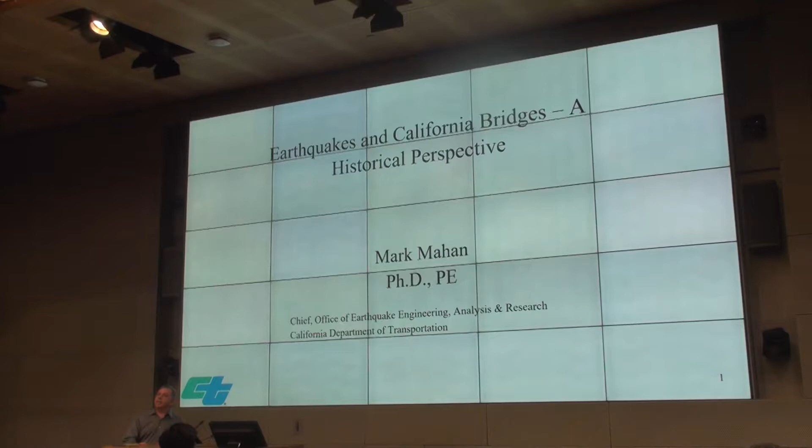The last presenter before lunch, but remember, I'm holding these. No flag, no lunch, okay?

Do I have 20 minutes or so?

Okay, again, I'm a practicing engineer. I've worked at Caltrans for the last 30 years. I've witnessed 2 of the big 3 earthquakes. I've been through Northridge, obviously, and the Loma Prieta in 1989. I was not around in 1971, but I need to present all those 3 earthquakes to you to see how much we learned, and to project into the future and make statements about the adequacy of our bridges for the next big earthquake that's going to come along.

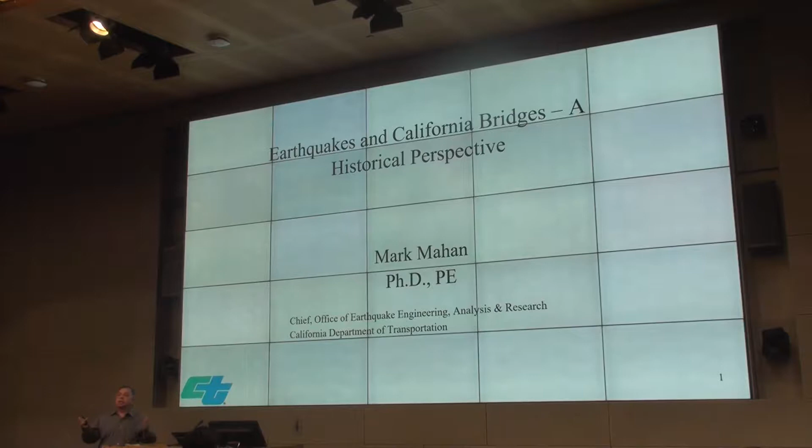California and Caltrans is the only DOT that writes its own seismic code. That's very important. FHWA, the feds, have trusted Caltrans to obtain an exception from all seismic requirements from all other 49 states, and then be able to write its own code. The reason that happened is because Caltrans and California was most at risk of earthquake, and it started earliest, after 1971, and then hustled and put together a code, something called the seismic design criteria.

How many of you are familiar with that, SDC? Okay, so I'm going to give you a little bit of history of it on how it developed. Let's see if I have a pointer here. No pointers? Can you hear me back there, by the way?

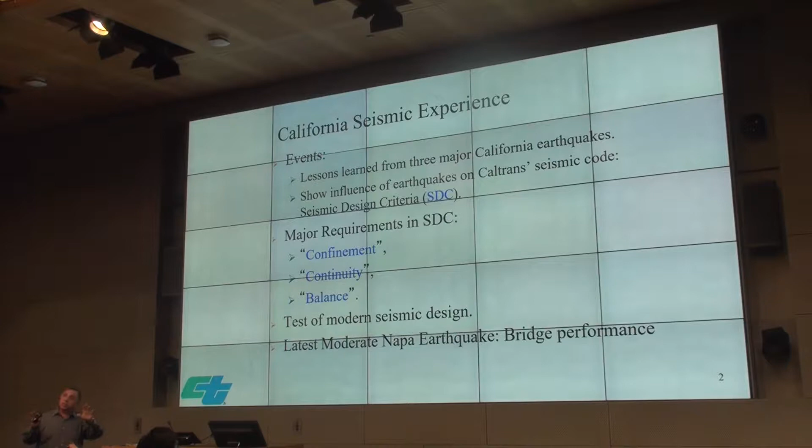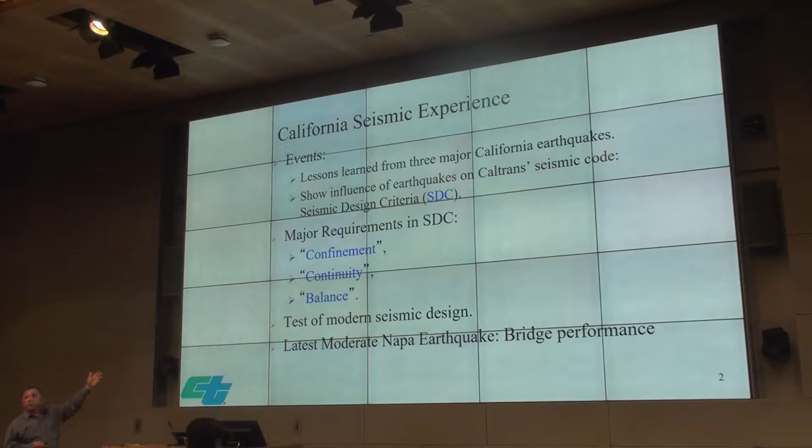No pointers, okay. I'm going to be talking about 3 major earthquakes and how we learned about confinement, continuity, and balance. That's my take of all the things that we have learned. Again, I'm highlighting those 3 items, and there are a bunch of other things that are, in my opinion, relatively minor to this. And after you do your billion dollar analysis at Berkeley, you come to Caltrans, and you only have to meet these. That's it, 3 small items.

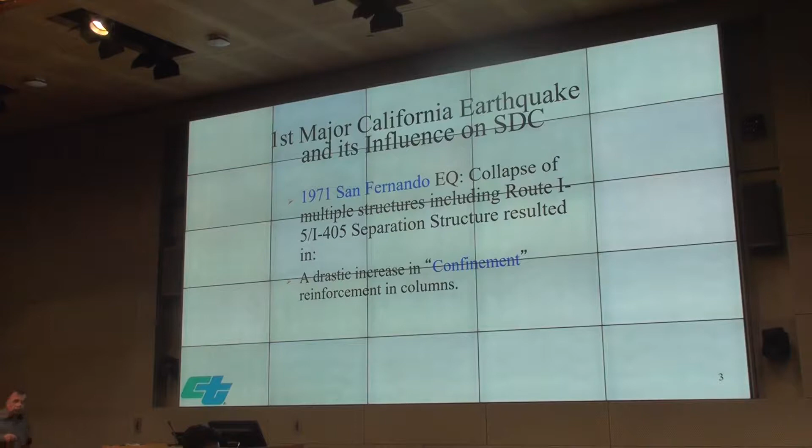Otherwise, that bridge would have completely collapsed. So that's why there were losses after 1994. 57 was mentioned, but on Caltrans bridges, unfortunately, just 1 loss, and that was a highway patrol officer. Okay, so we were lucky here.

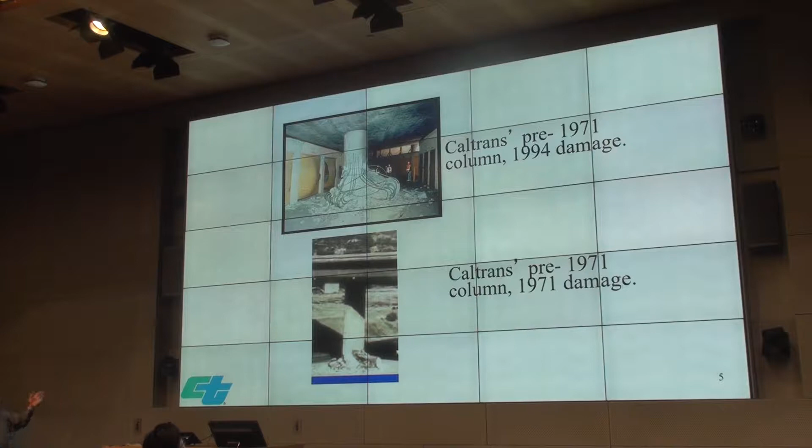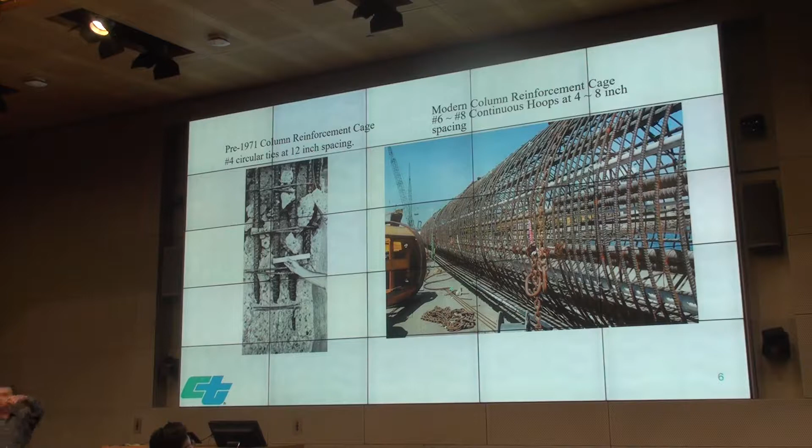We improved it tremendously till '89, and after '89 we bumped it up further. You see the picture on the right, that shows a column cage, and you see the amount of confinement on it, the hoops, the number of hoops. And the hoops are now what we call butt-splice continuous. Hoops are welded with ultimate splices, okay?

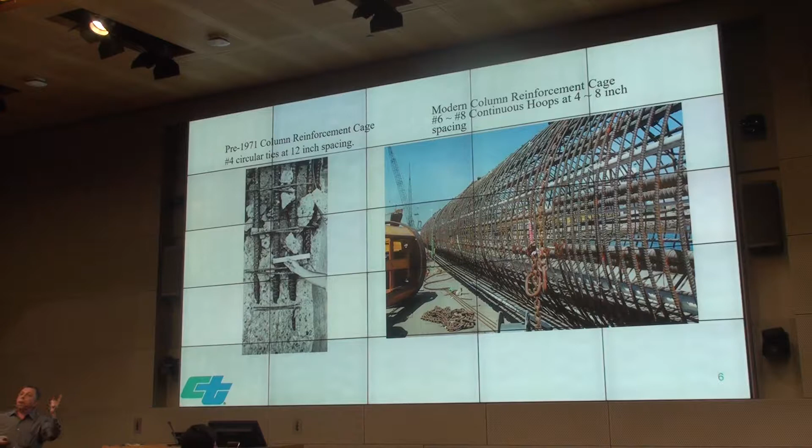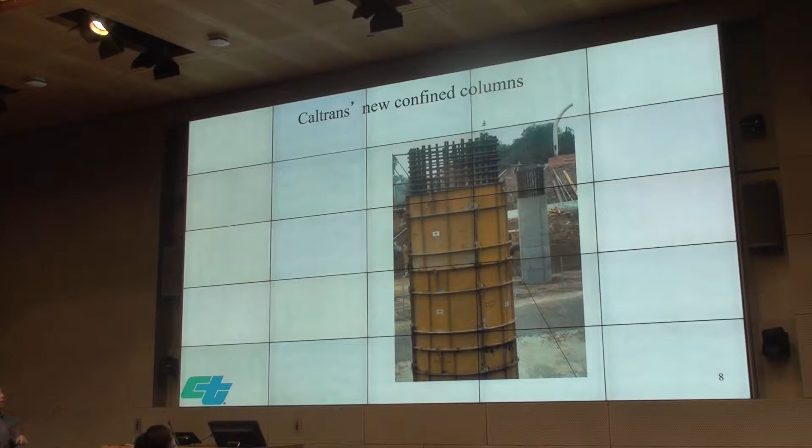We put that part of the cage into the superstructure to provide continuity, which I'm going to talk about. Again, the picture from 1971 - you see that column did not have much confinement to hold. We were lucky again, that bridge did not collapse.

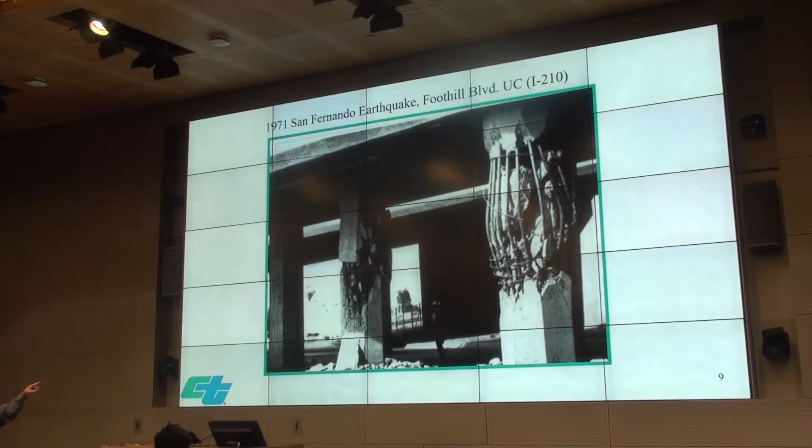It was very close. Okay, so the thing that you've got to meet, common sense engineering - it says delta capacity, displacement capacity should be greater than displacement demand. Common sense. Earthquakes demand deformation. If your structure, doesn't matter if it's a bridge, building, or whatever, can provide deformation capability, you can go through the earthquake without collapsing the structure. You may have to retrofit or replace the structure, but you can prevent loss of life. Okay.

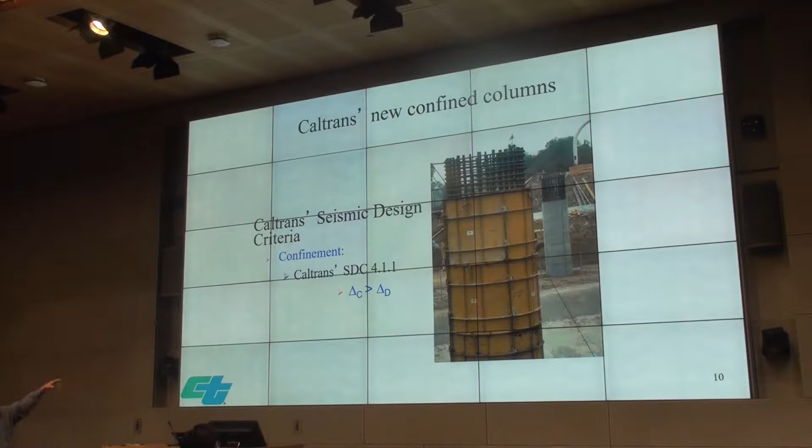So that is given in the seismic design criteria section, so we have to meet that. How do we do that? Well, we have to quantify the amount of confinement. The more confinement you put in a column, the more displacement you can get out of the column.

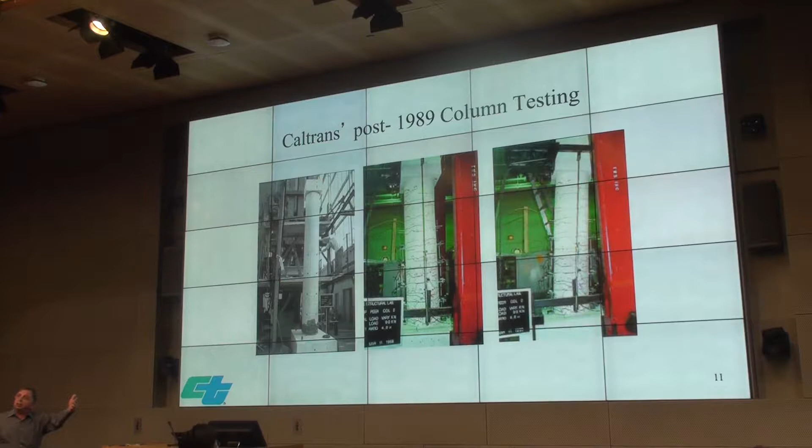We build small scale columns. We really cannot build the 6 and 7 foot columns that easily in the laboratory. You'll see we have limitations. So on these columns, we push and pull.

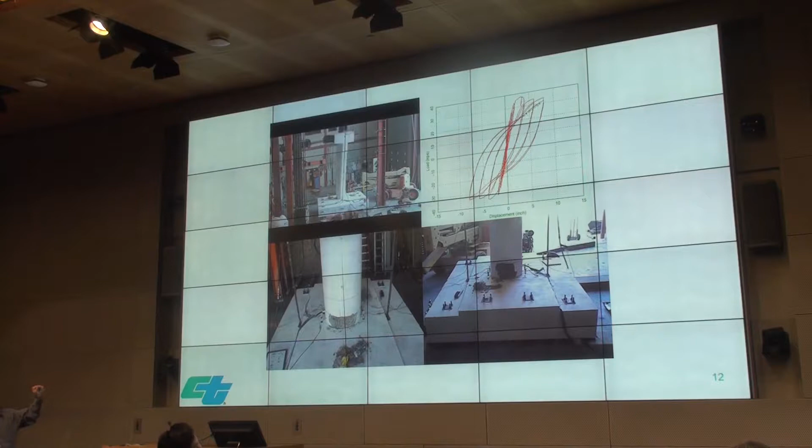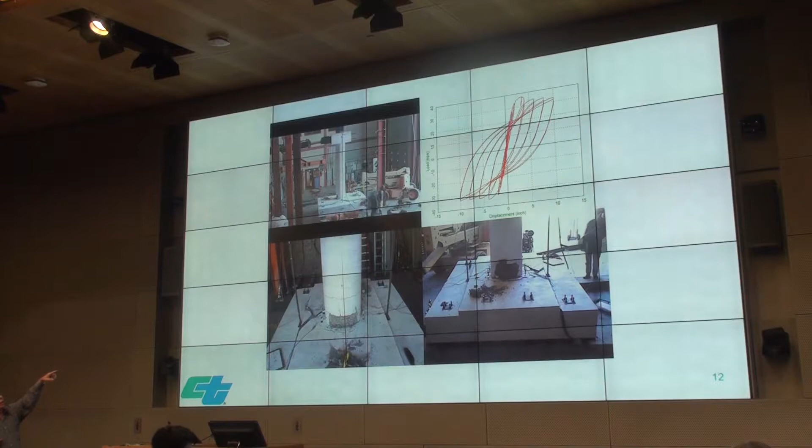And Caltrans has done that. We have used models from various universities, but we do have a model in our seismic design criteria. The picture on the top right, that's a hysteresis. That shows the performance of that column. The fatter and the bigger that hysteresis is, the more energy absorption capability of that column.

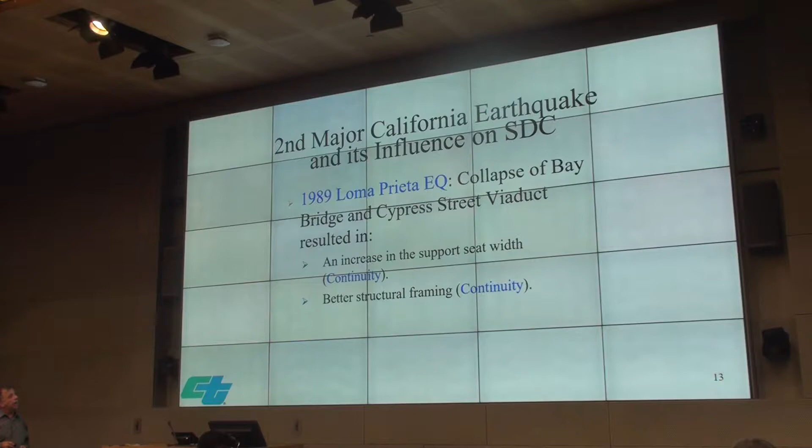The second earthquake, Loma Prieta, 1989, that was very bad. 40-some lives were lost at Cypress Viaduct, and at the Bay Bridge there was a loss of life, several losses.

This is the famous Bay Bridge where that piece in the middle, the 50-foot piece, fell. We were lucky because it did not punch through the bottom deck, and it did not go through the tower, because if it had done that, then the spans on both sides would have come down.

This bridge was designed for a 5-inch ledge on the left-hand side of that failure, and the slab, that floating piece slab, was sitting on it 5 inches.

Engineers back in the 1930s, when they designed this, I believe they designed it for 6% of G, 0.06 G lateral force. That's more or less the same amount as wind, comparable to wind. They couldn't imagine what kind of movement we're going to have on big bridges like this.

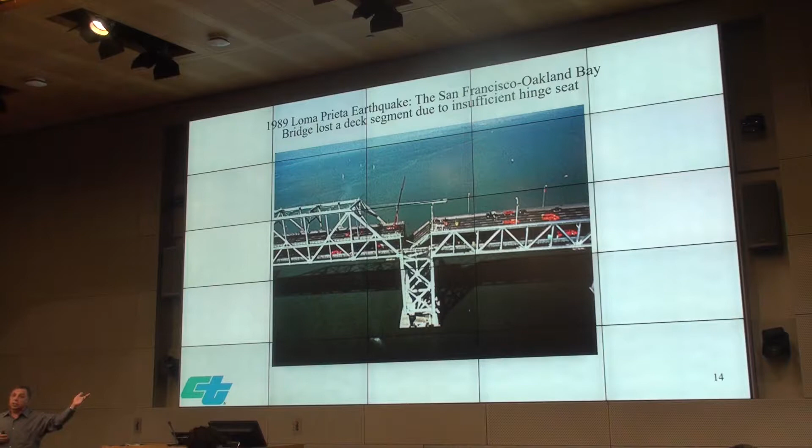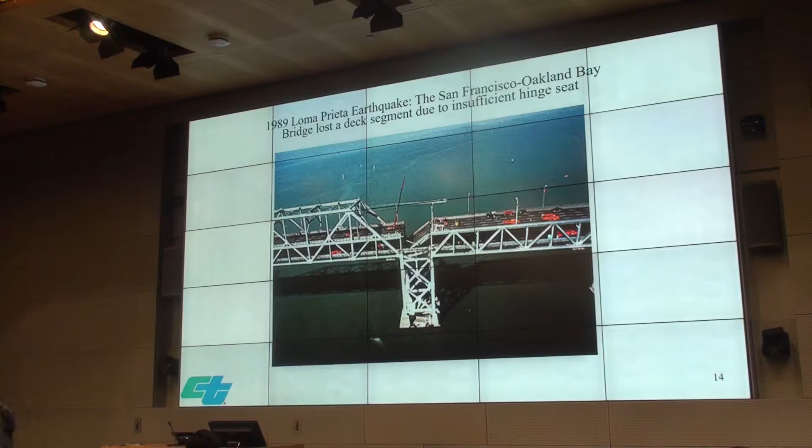It turns out the displacement demand is much larger. Even on the new Bay Bridge, the estimate of displacement demand is much larger than the 5 inches. Obviously it was not adequate, so it unseated and it dropped.

As you see here, in the 50s and 60s, you see that hinge, that expansion joint up there in that superstructure. That was a typical design. It was designed for 6 inches, and with shrinkage it would be really effectively 4 inches, and as soon as you shake the bridge, this joint will open up and we would lose one side of the bridge.

That was typical, and then we have a retrofit solution for that. We get inside the box and we put pipes through. The restrainer cables we did for a period of time, but now there's the best solution: we put a pipe through, so if it comes unseated, it sits on the pipe. It doesn't fall down.

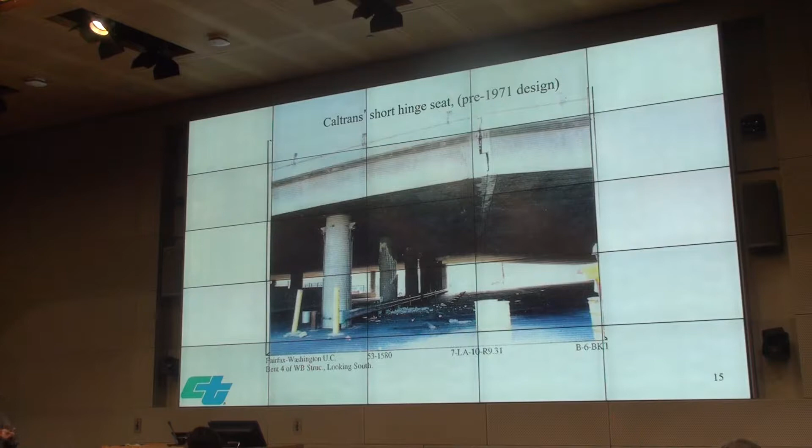The worst structure was the Cypress Viaduct. This happened because there were joints in the columns. There were 2 joints, one at the lower level, one at the upper level, and out of the 2 column bents, there's a column that you see and a column on the other side of the bent.

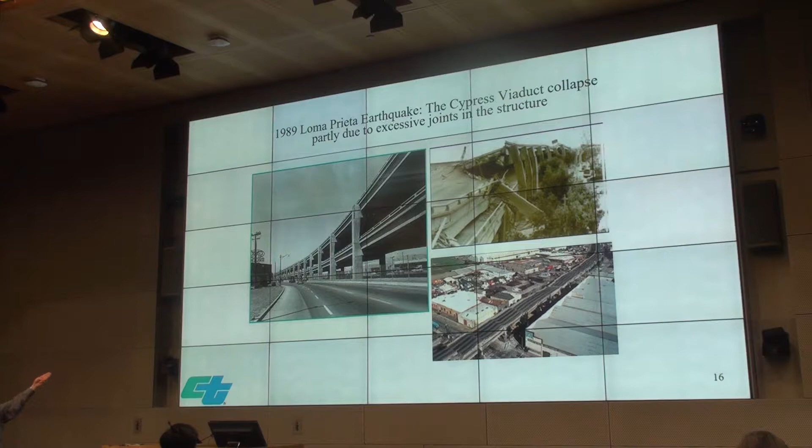Out of the 4 joints, there were 3 of them that were pinned, and the reason they did that was because of pre-stressing needs. Again, service performance dictated those joints, and those joints did not hold, and you see the pictures in here of all the failures. What do we do now?

We have no choice but to build continuous cages. These are column cages. You see how tall they are, how difficult they are to pick, and it is dangerous to pick this, but again, we have no other choice. We have to provide continuity for our cages.

Our structural elements cannot have too many breaks in them. The better the continuity, the better the performance during earthquake.

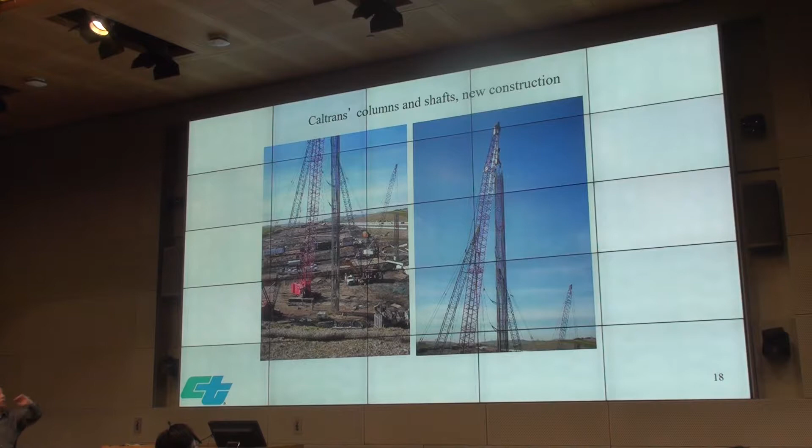This is from the New Bay Bridge. The picture on the right, on the top, that piece is going to be lifted, put on the piece on the left, and the two are going to be coupled together by means of what we call ultimate couplers, and that's the one right below, right there.

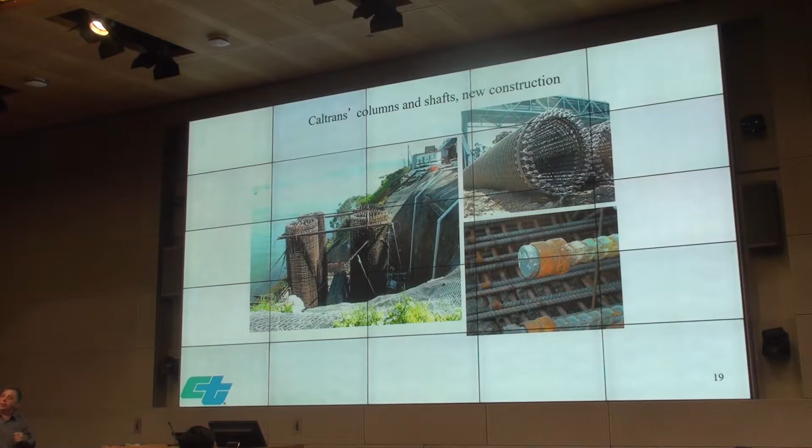Those are again developed by specifications that Caltrans developed. Ultimate splices was the requirement that was invented at Caltrans, and since then it's picked up. A lot of people are now using ultimate splices, and those are splices, mechanical couplers that if you pull it, you break away from the coupler. You break in the bar, not the coupler.

So, continuity - as we learn from it, we put it in our seismic design criteria. We have minimum standards now for our seats: 30-inch at abutment, 24-inch in the superstructure. We're going to bump that up in the next release to 30 inches to buy even more insurance. And in the cast-in-place box girder bridges that Caltrans typically builds, we provide enough continuity. We're comfortable about that.

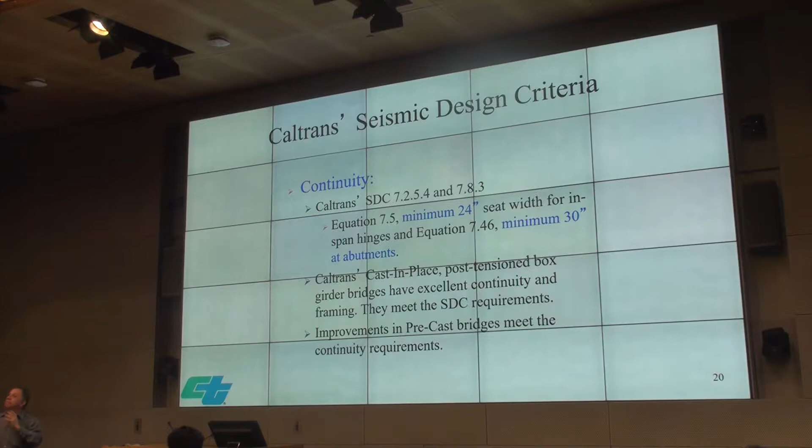Precast is a new phenomenon with what they call accelerated bridge construction. We have to build bridges faster and faster, and to do that we have to use precast elements. To do that, we have to provide better continuity, because one of the problems in Northridge was that if you put beams on columns and don't connect them properly, you shake them and you're going to drop them. So joints become very, very important in precast bridge systems.

What we learned - we thought we had figured this out before the '94 Northridge earthquake, but that taught us a lesson on balance. I'm going to focus on this and show you what that is.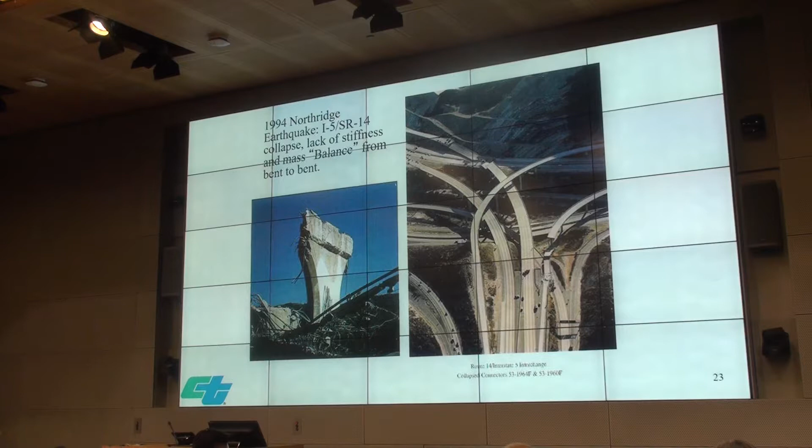A lot of people are using that picture, and the funny thing is that the bent stands up and the superstructure sheared off completely clean. It was puzzling for a while. A lot of people looked at it - UC San Diego, Professor Priestley, and others in seismic research examined it.

After a month or so, the conclusion was that if you look at the abutment in the background, where the car is parked, there was a loss of elevation, and people were puzzled why that drop was there. Then if you look carefully, the picture on the top right shows a completely crushed column. The picture on the top left shows the detail of that, and the picture below shows the loss of elevation.

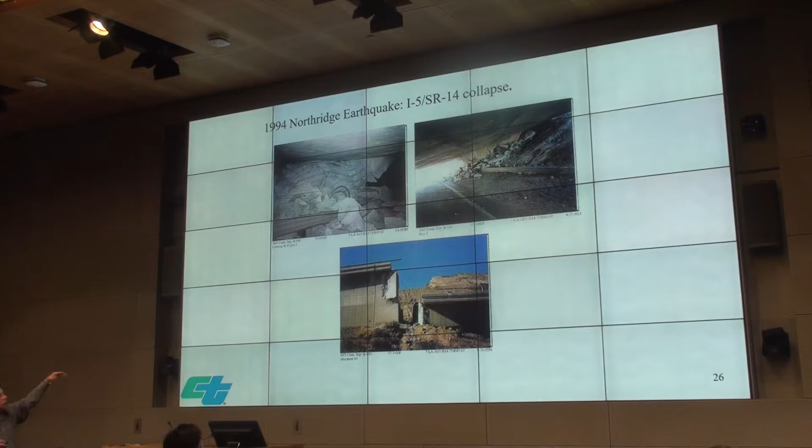There was a column further back, very close to the abutment, but it was a very short column - much shorter than the other bents. Therefore, when the bridge moved longitudinally, the short, stiff column took all the shear, failed in shear, and then the superstructure came down and started pulling on the rest of the bridge.

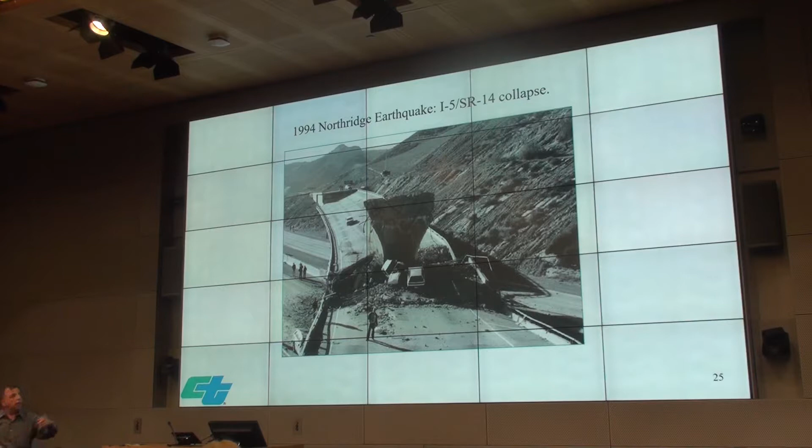That pulling caused a hinge two spans over to come unseated, and that came down. Once that came down, the superstructure connected to this bent on both sides got kinks in it - both sides were down. So those sheared off, and that's the picture, and that's how we learned about balance.

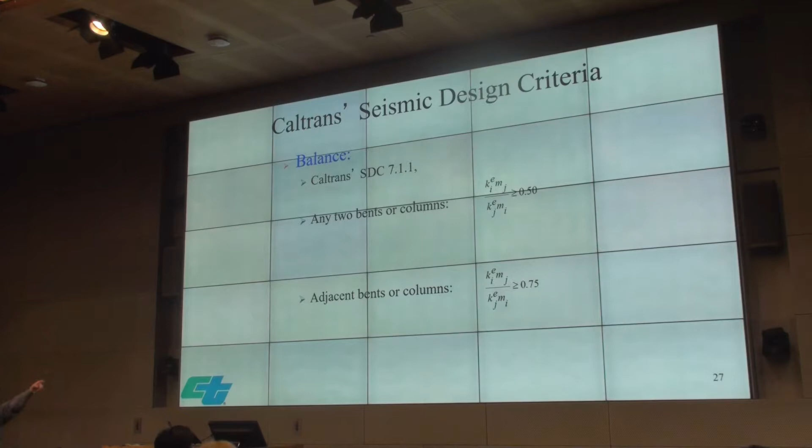So we are very careful not to do these things anymore. Looking at the lower picture, K2, K1 - that short column is going to be in trouble. So what are we doing with our existing columns? Unfortunately, you cannot change the balance on existing columns - it is whatever it is.

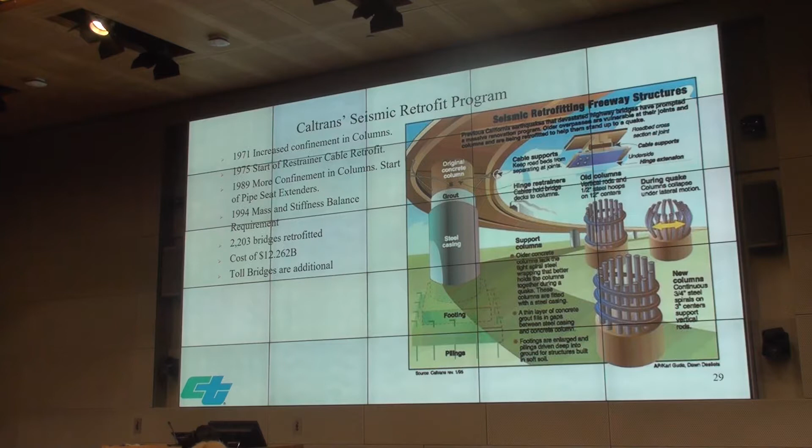So we jacket it and provide as much shear capacity as we can. Jackets work both for confinement and shear capacity. What is the proof in our practice? We build large column shafts - this is a 6-foot diameter column, actually tested by this university.

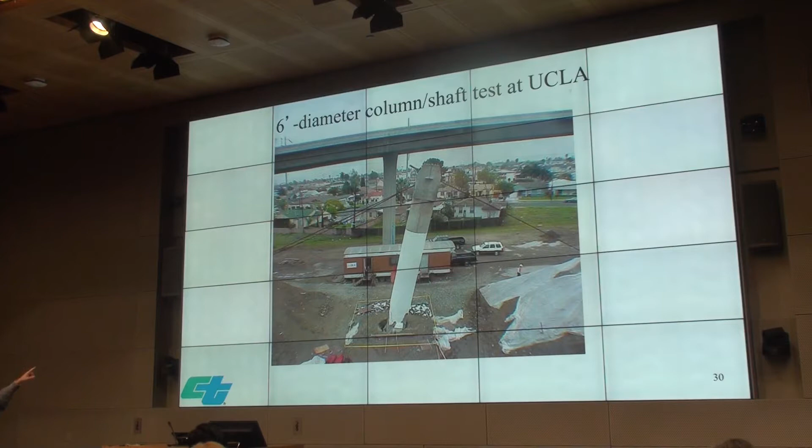We are abusing that column, pushing and pulling on it, and at this point we are not holding it with cables - we are actually pulling, meaning there is some moment capacity at the base of it. If you look at the base, you see that plastic hinge.

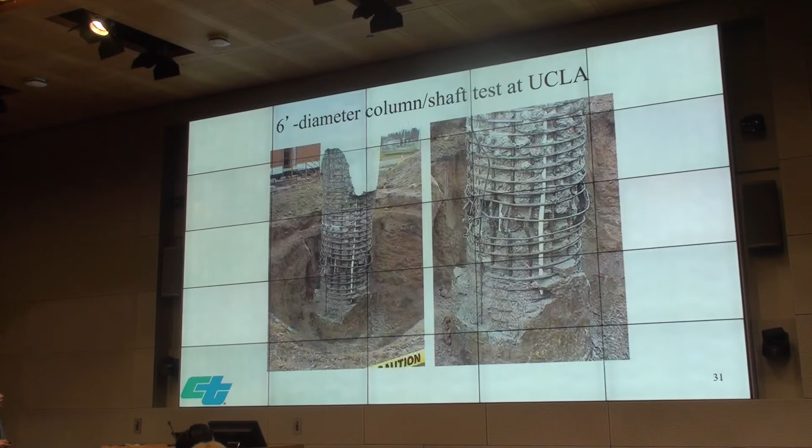So there is capacity left in there, proof that that column can go through that much displacement, 100 inches or so at the top. Very ductile column. This is a large size research, courtesy of UCLA, 250 tons, 500 kips of dead load on it, and the framing, the red framing is to catch it.

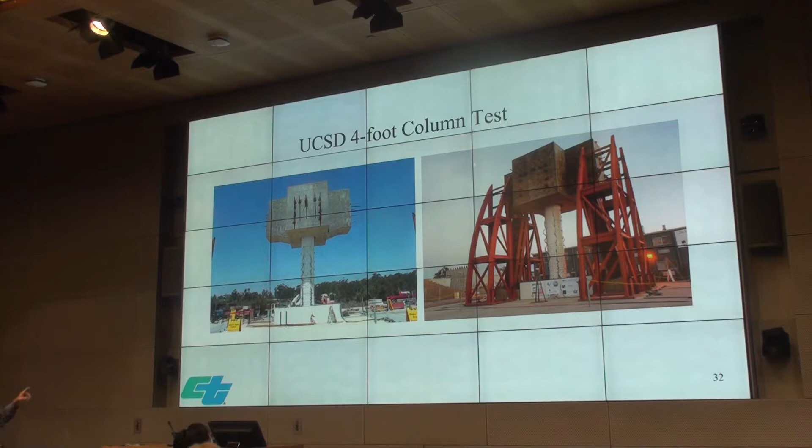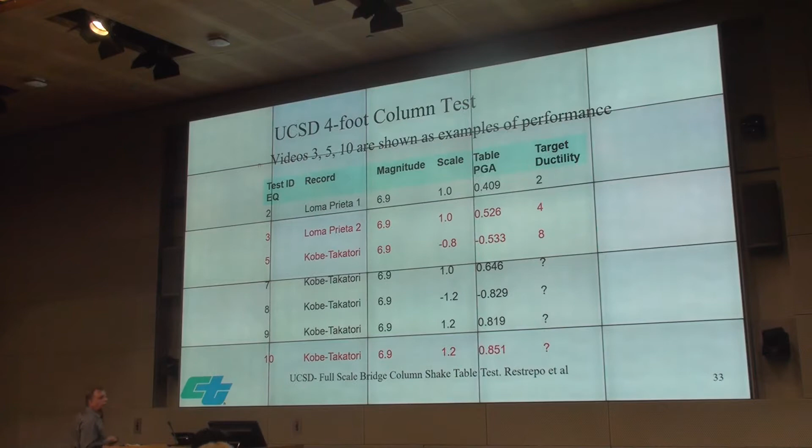We did this 4-foot diameter full-size column, and it went through several earthquakes. Earthquake number 3 was the design earthquake. It did not fail at earthquake number 3. Had to go to earthquake number 5, which demanded twice as much displacement as the design earthquake. It did not fail again, but all the way to earthquake number 10 and eventually stopped.

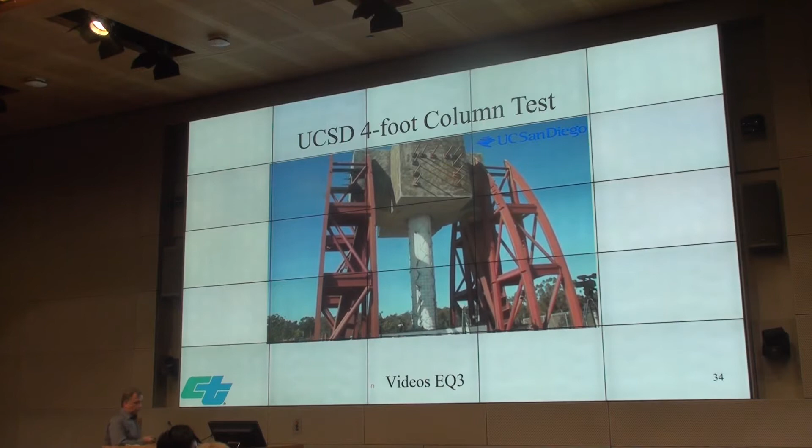Here is the shaking. This is the design earthquake. And then we're going to see the same earthquake, but we are now looking at the base of this, at the fixity of the column at the bottom.

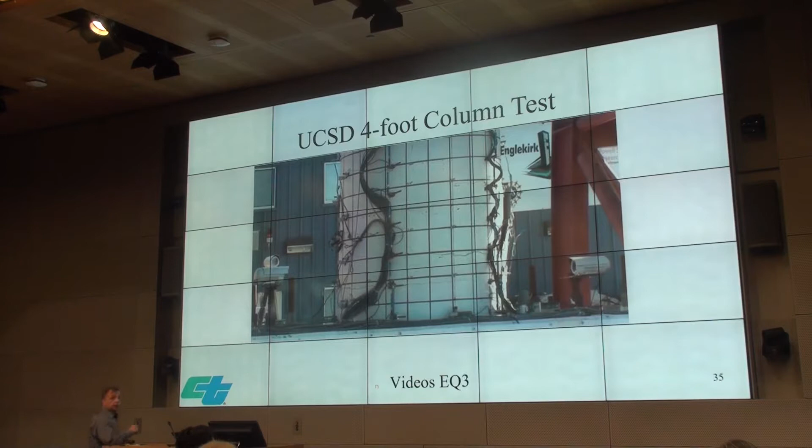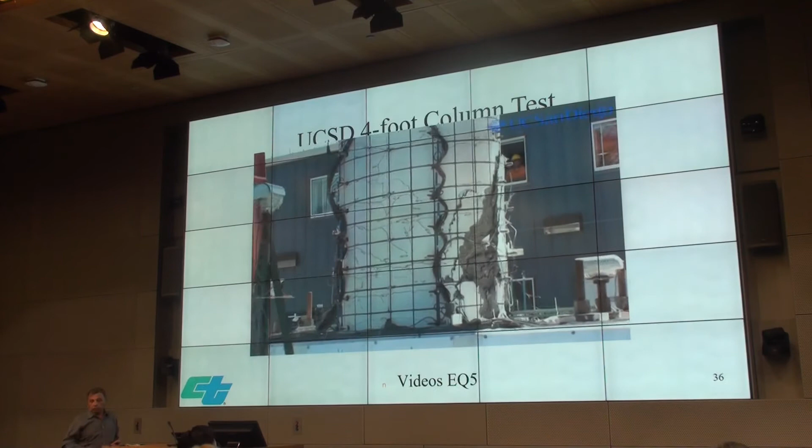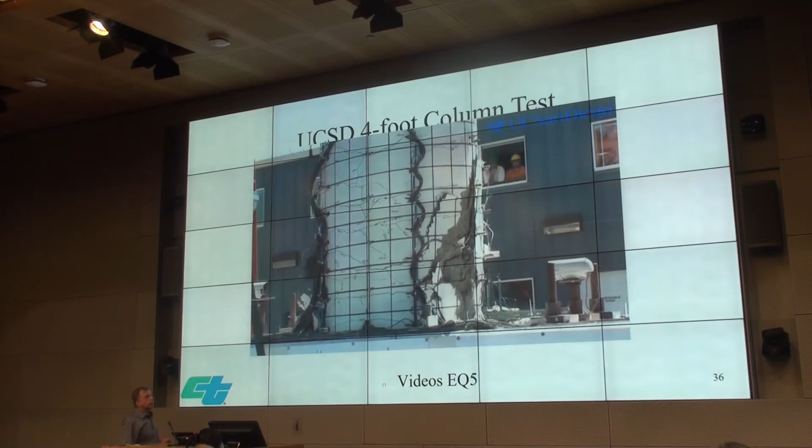So you see there is a lot of conservatism in bridge practice. This was the design earthquake. Theoretically, on paper, we were supposed to see a lot more damage than this. This is twice the demand, meaning ductility of 8 out of the column. Again, we are looking at the bottom of the column here. And finally, this is the last earthquake.

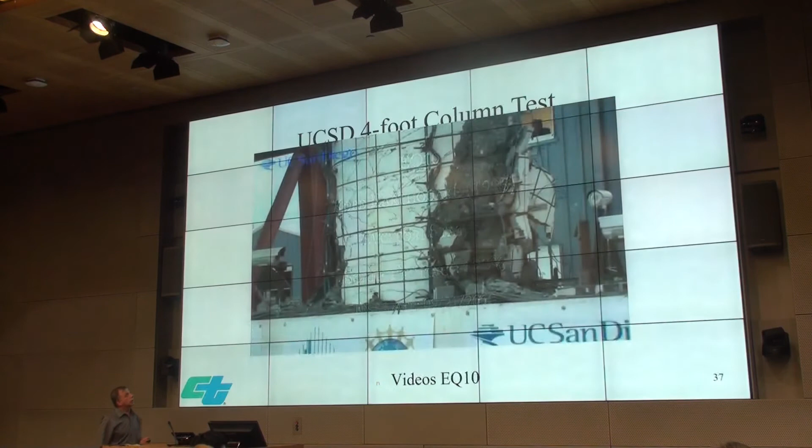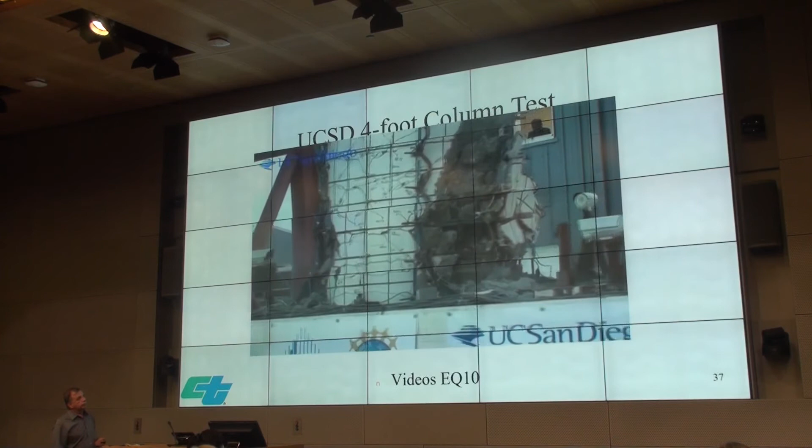Luckily, all that conservatism is going to pay off in future because, as it was said this morning, the demand side, the ground motion side is being studied, and everything, the demand is going up, up, up, and then we're going to have to meet it with reserve capacity here.

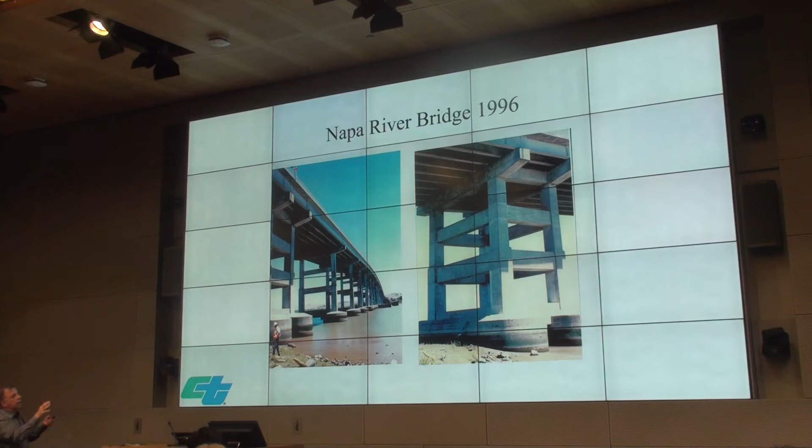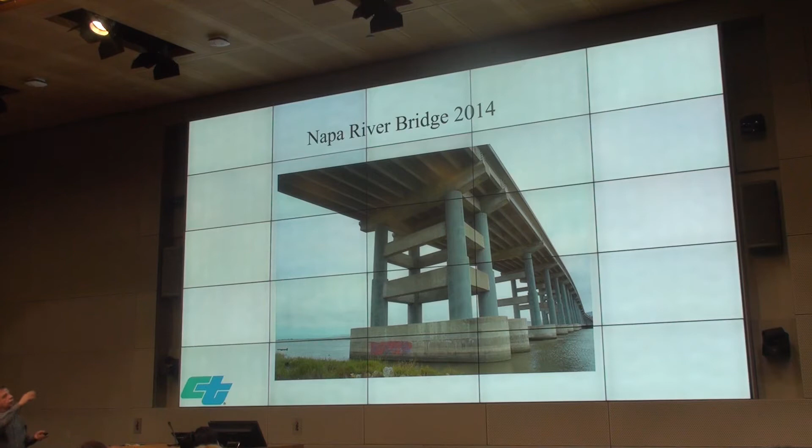It was built in the late 60s, and the columns were rectangular section, not much confinement in it. Luckily, this was retrofitted. You see those jackets, round jackets around the columns? Full jacketing, full rebuild of foundation and superstructure. A lot of money spent there, but it paid off. You can see the one on the left and the right, the difference.

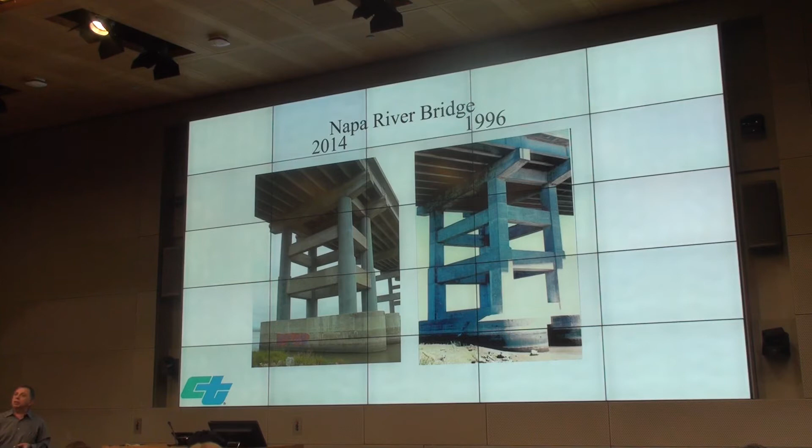And it paid off because even though it moved 6 inches transversely, inch and a half longitudinally, there was no damage to the bridge, and we put it back in service a couple hours after the earthquake. It was a very successful story.

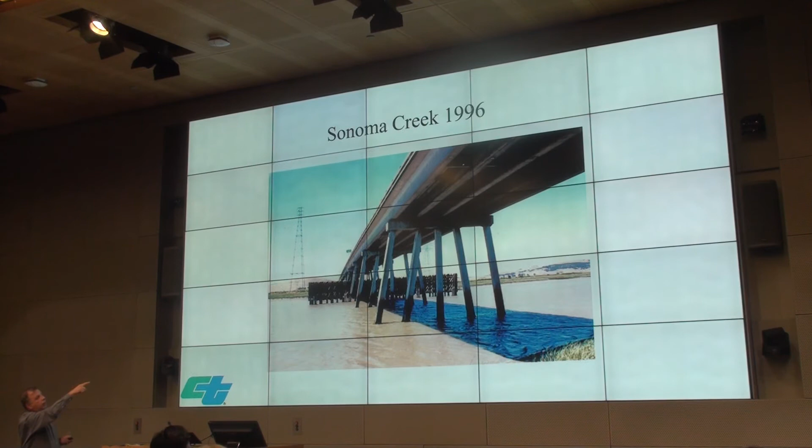And it survived after all. It survived after the Napa earthquake, no damage. Again, it was put into service immediately.

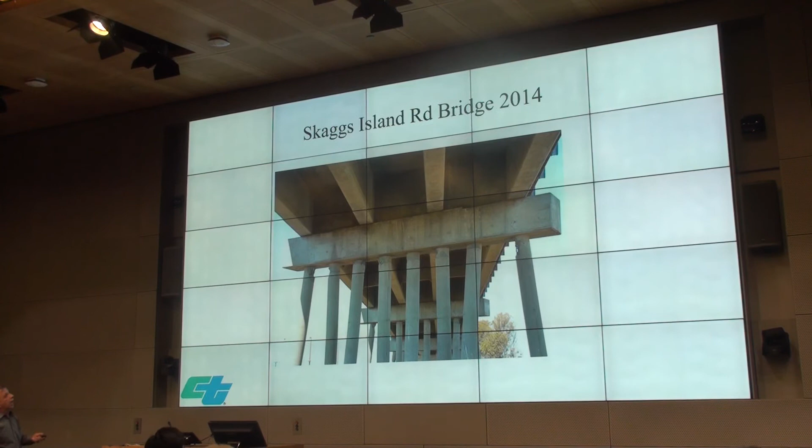An example of a bridge that took damage. This is not a Caltrans bridge, but another agency. If you look at the top, these are again pile extensions, battered pile extensions, and you see closer, you see the damage at the top. So this bridge moved around a lot. Sonoma Creek was held with the new pile column extensions, and that displacement was much smaller.

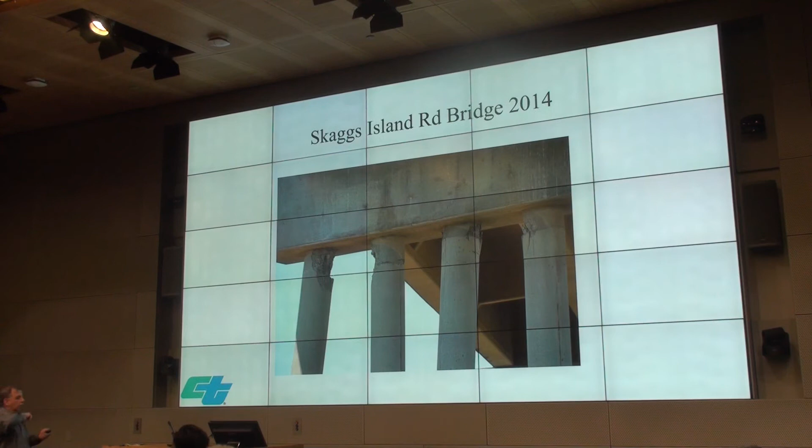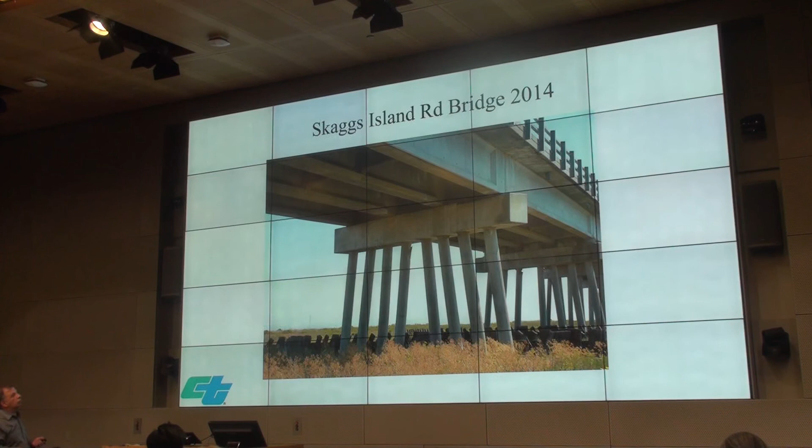These 2 bridges, this one and this one, they are very close to each other. You can see one from the other, but the same era bridge, one retrofitted, one not retrofitted, and this one had to close. And that's our investment into bridges.

So, comparison and conclusions. Basically, we are learning from earthquakes. We have learned a bunch of things. No one knows, maybe in the next earthquake there will be something new that we have not addressed, I don't know. But laboratory testings are promising.

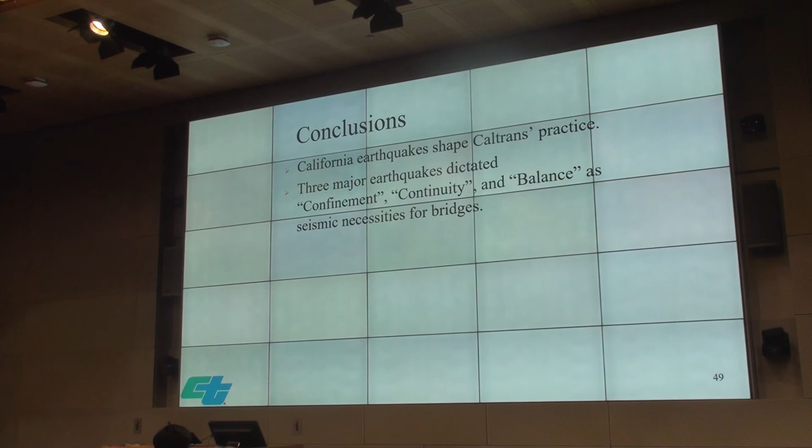Caltrans is willing to invest. We have invested quite a bit, and we will keep investing into these laboratory testings because that's the only proof we have. We don't want to really wait for the next earthquake, but we don't have much of a choice. It's going to come and it's going to shake most of the bridges.

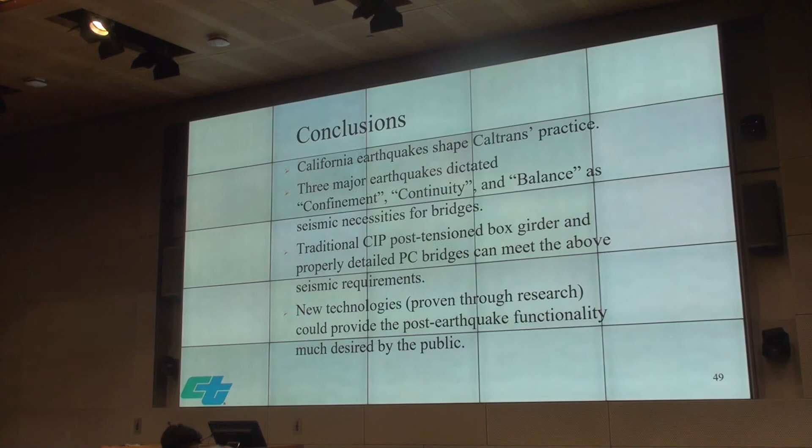And cast in place is our practice. Precast is coming along, and new technologies will improve post-earthquake performance. Thank you.